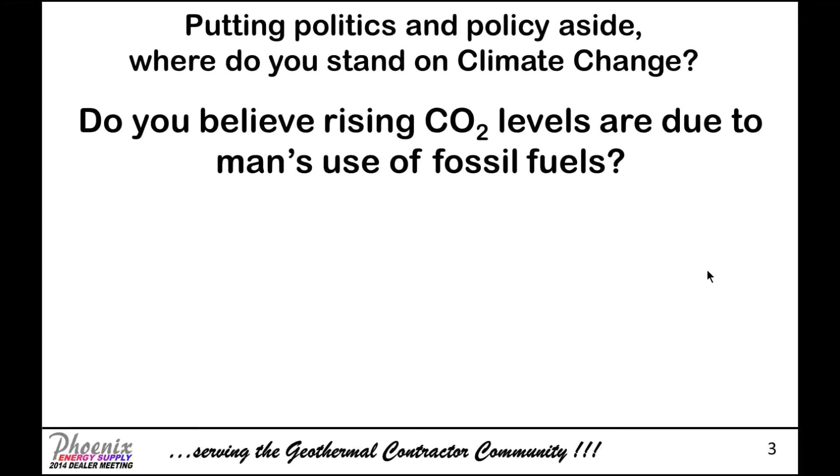The point of my presentation is simply your opinion doesn't matter if your true goal is to sell geothermal. You have to know your customer, and at the end of the day, you want to reinforce that your customer is making the buying decision for reasons that are important to them. My goal today is to arm you with some facts, some perspective that you might be able to reinforce in their perspective. And as Kermit said, it's not easy being green.

One very important aspect of the environmental benefits of geothermal is the so-called carbon footprint. To give you a benchmark, I'm looking at coal, which has a CO2 output per pound of coal of 2.48 pounds. The energy content is 12,250 BTUs. Efficiency could be anywhere, but using a number like 65%, I get a net CO2 output of 311 pounds per million BTUs.

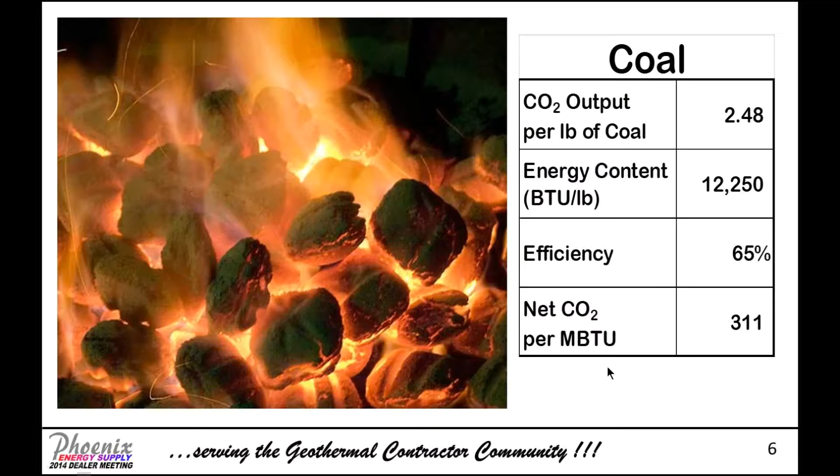Moving on to fuel oil, and of course everybody likes to see one of these in your basement, very sightly. But looking at fuel oil, the CO2 output is 26.4 pounds per gallon of oil. The energy content of oil is 140,000 BTUs per gallon. Efficiency, we'll use 82%. So the net CO2 output is 230 pounds per million BTUs.

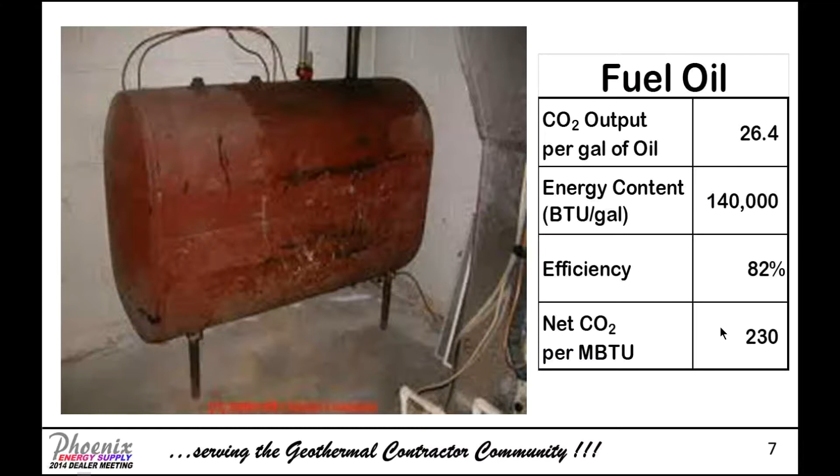And then, of course, you could choose to have one of these lawn ornaments near your house, and of course it's propane, and we all got put into sticker shock this year, or perhaps we're applauding the spike in propane prices. But the CO2 output for LP is 12.1 pounds per gallon. The energy content is 95,500 BTUs per gallon. Efficiencies could be much higher. It's fundamentally a cleaner fuel, so burning it in a condensing combustion is a good way to stretch efficiency with propane. But the net CO2 output is 135 pounds per million BTUs.

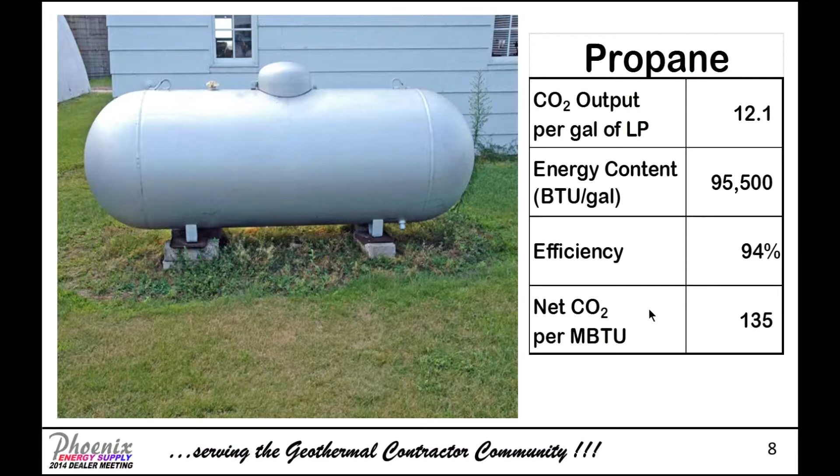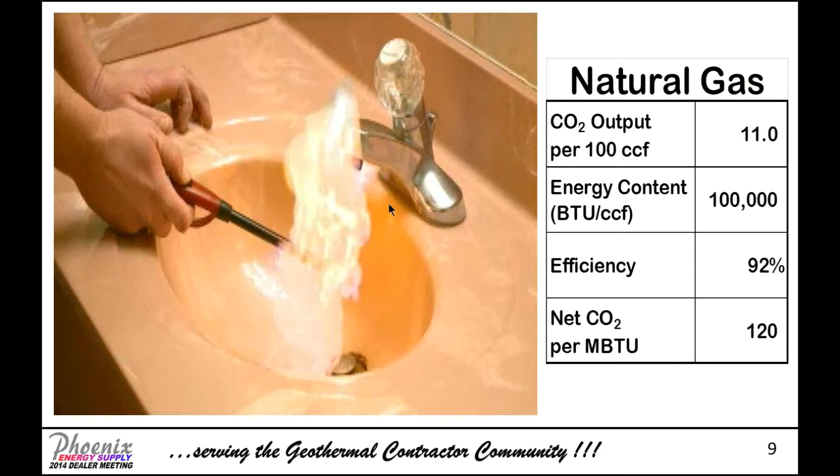And then our most favorite fuel, which is often touted as being environmentally clean, is, of course, natural gas. Now, you all in the East may not be as sensitive to fracking as New York State and other states have become. Perhaps this is a little unfair to illustrate natural gas coming out of your faucet, so we'll go ahead and use a more conventional furnace. The CO2 output per 100 CCF is 11 pounds. The energy content is 100,000 BTUs. Efficiency could be 92%. So basically, natural gas will emit 120 pounds of CO2 per million BTUs.

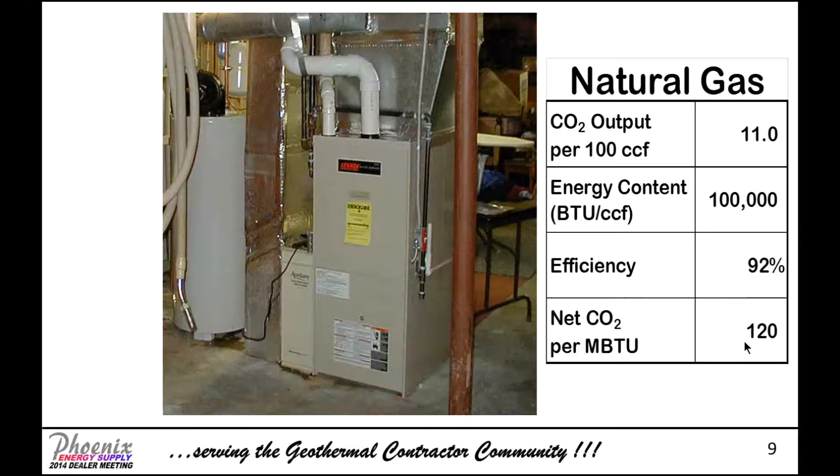Now let's look at electric resistance heat. The key parameter here is how many pounds of CO2 per kilowatt hour. It varies all over the place. If you were to live in Chicago, you're probably close to 2 pounds per kilowatt hour due to the fact that 95% of the electricity is generated with coal. The 0.49 pounds is indeed central New York, which is a fairly clean area of New York. New York State average is 0.76 pounds per kilowatt hour. I would encourage you to explore your own local generating utility companies to see what their carbon footprint is. The energy content, 3,400 BTUs per kilowatt hour, is essentially 100%. Every kilowatt hour does indeed turn into 3,412 BTUs. So the net output of an electric resistance heater in central New York is 144 pounds of CO2 per million BTUs.

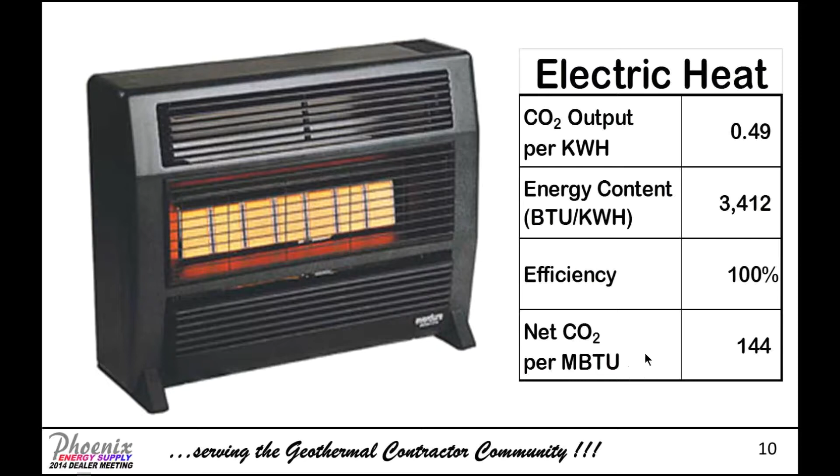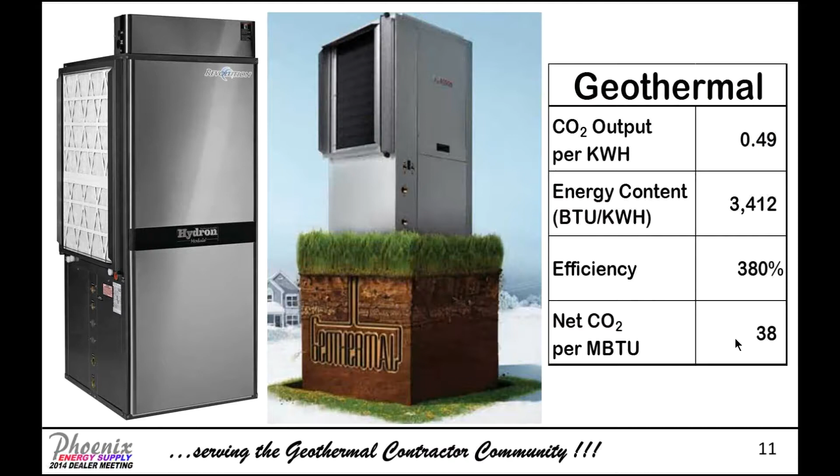Moving on to geothermal, again you've got to calibrate it based on your local electricity generation mix, and certainly in the long term, the grid will get greener, so it will improve over time. Energy content, again, is 3,412 BTUs per kilowatt hour. However, we have an efficiency, a COP of 3.8, we could essentially say it's 380% efficient, and therefore we're going to emit 38 pounds of CO2 per million BTUs.

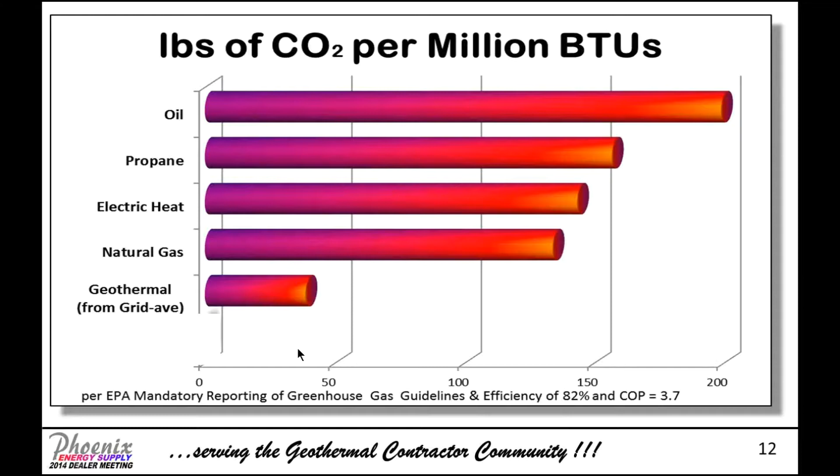To illustrate this graphically, we can show the oil, propane, electric resistance heat, natural gas, and geothermal in terms of pounds per million BTUs. However, geothermal, when combined with renewably generated electricity, truly makes a zero carbon situation within reach. Whether you generate electricity on site or you buy from the green portfolio off the grid, you can truly achieve a net zero, not only in energy, but in carbon.

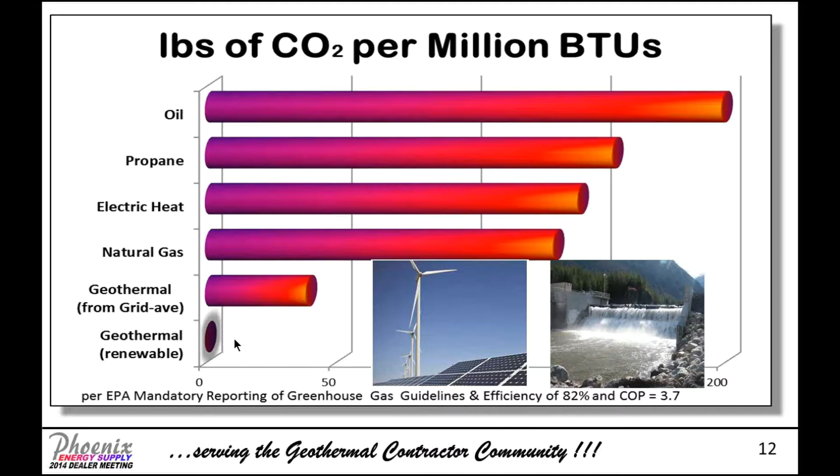We've developed these posters. I know you probably can't read any of the data on here. We've used these effectively to compare geothermal to other renewable technologies. And there's certainly been a debate as to whether or not geothermal is renewable, but considering three-quarters of the energy is essentially harvested solar energy from the ground.

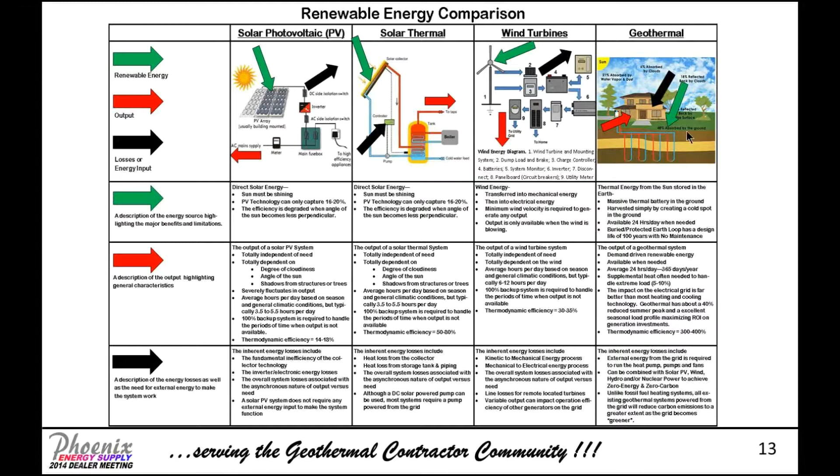This is the first page. The second page, there's a couple lines I do want to point out in making this comparison. One is, what is the average hours per day that the various renewable technologies are available? Geothermal is around the clock, 24 hours a day. The installed cost, generally solar PV is going in for anywhere from $4 to $6 a watt right now, compared to geothermal, which is going in at about $1.50 to $3 a watt.

Market penetration potential. Not every house is going to be suitable with the appropriate orientations and solar exposure to have significant market penetration.

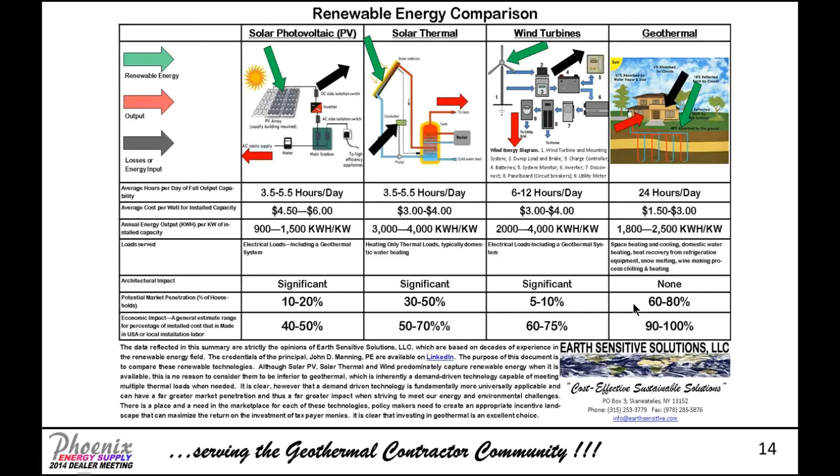Whereas I believe geothermal, most of the buildings out there could be dealt with on a geothermal technology of one kind or another.

So what do you say when your customer asks you about the environmental benefits? Keeping in mind the focus is to close the sale and sell them a geothermal system that meets their needs. Basically, I would suggest you mirror and reinforce their reasons to spend money with you. Stay in your comfort zone, but expand your comfort zone. Understand some facts that can help sway them to writing the check.

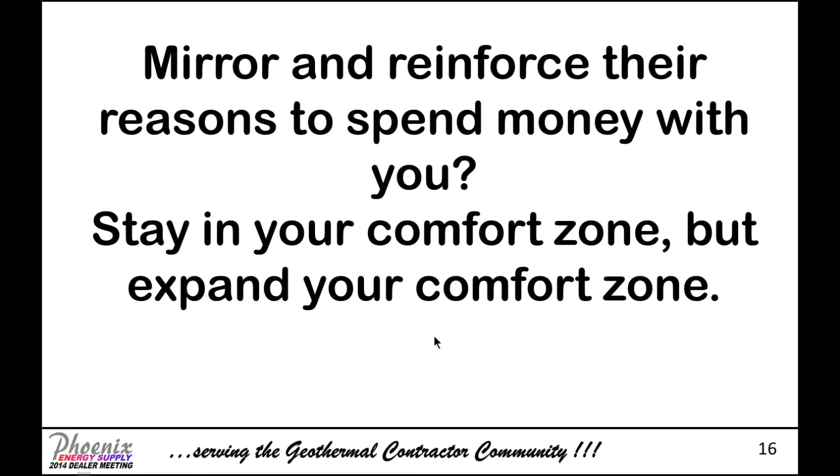So the question: do you design or install hydronic systems using water-to-water heat pumps or geothermal heat pumps? I know it's a growing area. A good percentage of our business is in water-to-water heat pumps, and I think there's a lot of good reasons for that.

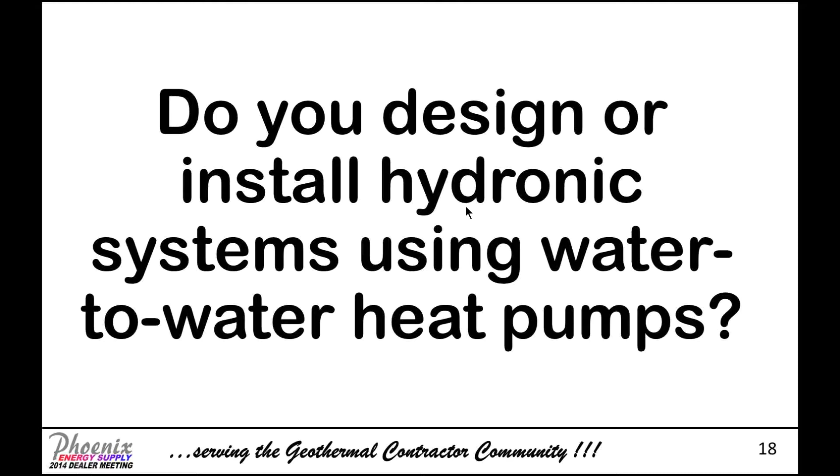So the first step is understanding that the load distribution system will determine the temperature that you will need to satisfy the BTUs in the various zones of this application. And the use of outdoor reset or other demand-driven control strategies will allow this temperature to be optimized.

To improve overall seasonal performance. But using the single design day requirements will allow us to analyze the system performance.

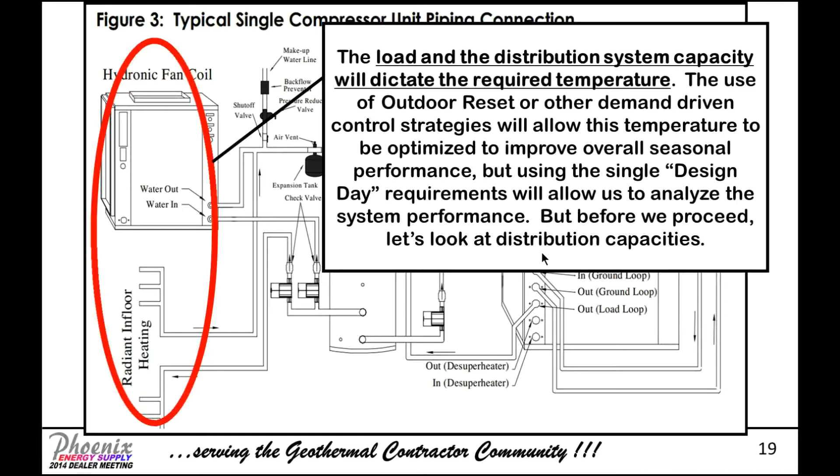So I'm going to walk through some calculations, some examples that illustrate this point. We're going to use design day requirements. But before we proceed, let's look at distribution systems and capacities.

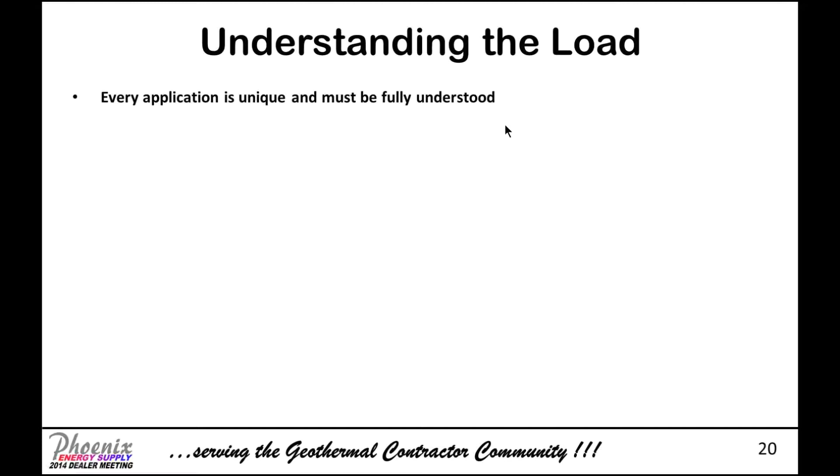Understanding the load: every application from a hydronic perspective is unique, and it must be fully understood. Experience in a specific type of application may allow some seat-of-the-pants estimating, but should never replace the appropriate calculations when designing a system.

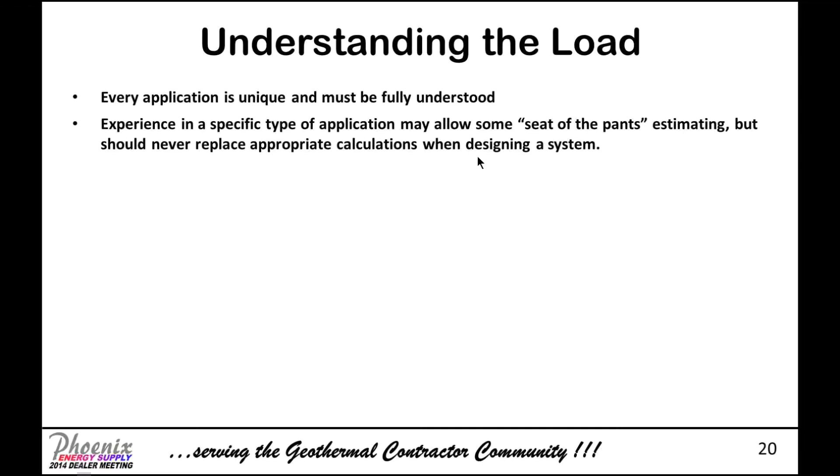I've seen way too many hydronic jobs get in trouble just because too many assumptions were made up front, and it's very hard to go back and retrofit and make significant changes to the distribution system.

Generally, in upstate New York, and I'm sure Connecticut as well, residential heating loads will fall between 11 and 23 BTUs a square foot, with 11 being an extremely well-built, tightly constructed house, and frankly it's very unusual to find builders that build that good.

And the 23 being older, single-story homes.

I've seen some farmhouses that might be upwards to 30 to 35 BTUs a square foot. But for the sake of our analysis, we're going to look at 18 BTUs a square foot as an overall average for a house.

That's the average for a typical house, while the room-by-room calculations can also offer up a wide range. You may have a corner room with multiple windows that needs more energy than a central or isolated room in the house.

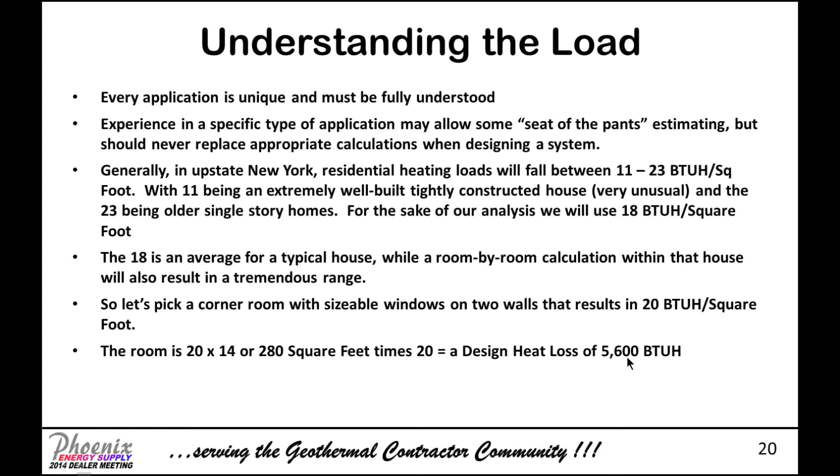So let's pick that corner room, and we're going to raise it up to 20 BTUs a square foot. And we're going to say it's 280 square feet, just to give us a number to work with. So the heat loss on a design day is 5,600 BTUs an hour.

To cover those really nasty days, and we've all had a bunch of them this year, I would use a safety factor for that particular zone, or every zone in the house, to put out more heat than the design day. Because typically with a boiler, we have a safety factor built in.

We can turn up the temperature, but with geothermal, we can't. So we've got to make sure we've got enough distribution capacity to meet that load, even on the worst day you could imagine.

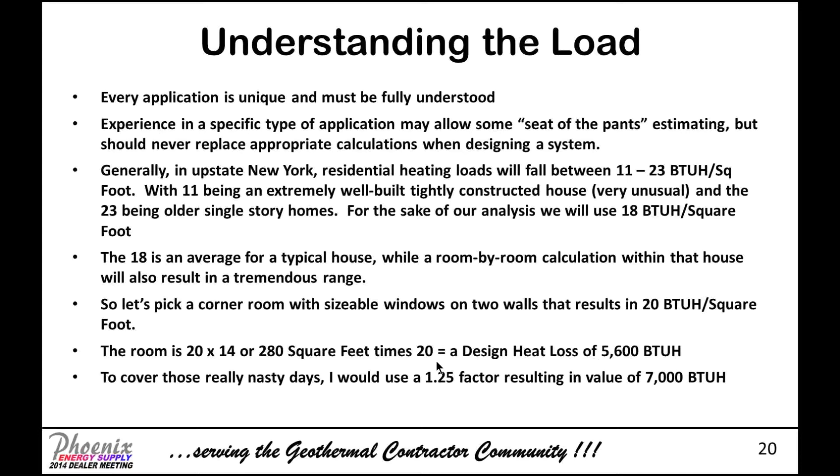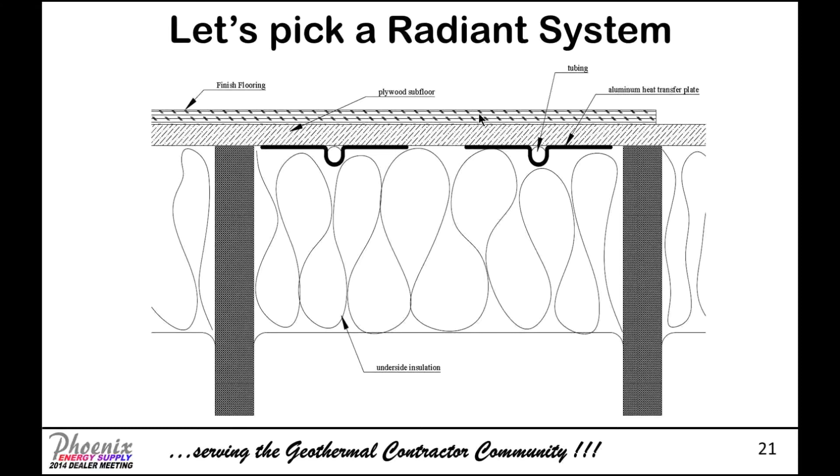A typical layout looking up from the underside of the floor, you've got your floor joist. You've typically got two runs per floor joist cavity, which works out to be 8 inches on center. And there's a certain performance that we can calculate with this type of setup.

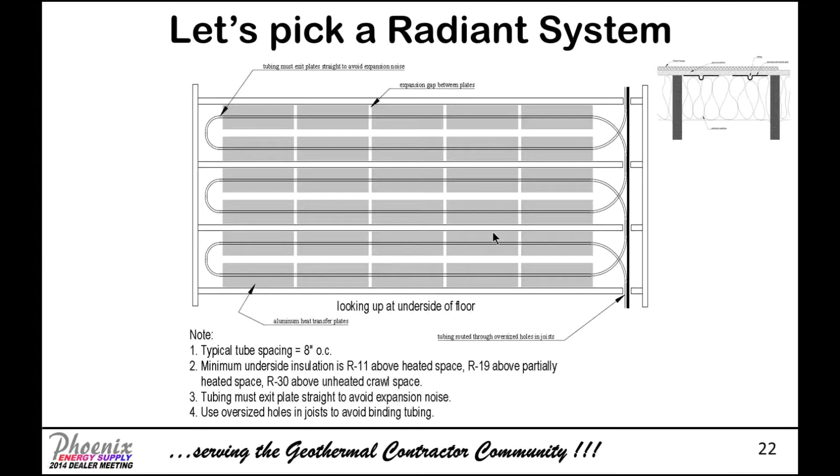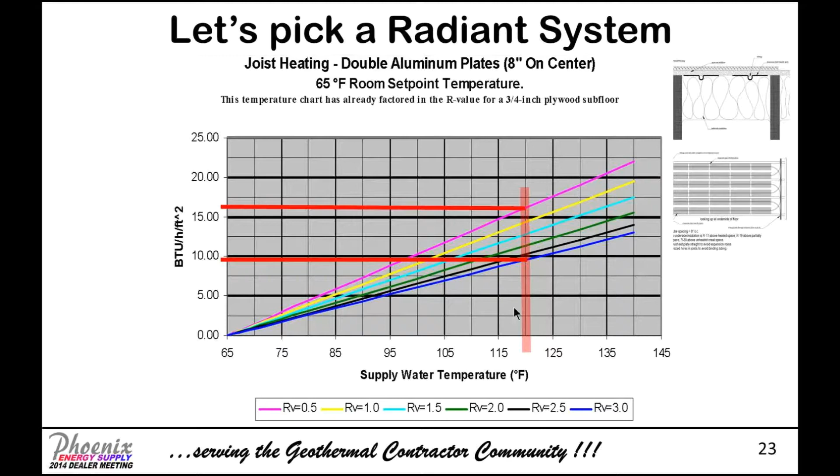That's illustrated here in this chart, where at various entering water temperatures and various resistance values reflecting what might be on top of the floor—whether it's carpeting, hardwood, ceramic, or throw rugs—you'll end up somewhere in this spectrum, with the highest output being totally unencumbered hardwood or ceramic floors. If we put a maximum water temperature of our geothermal system at 120 degrees, that highlights the range of output we can expect on a staple-up system: anywhere from around 9.5 to 10 BTUs a square foot, upwards to maybe 16.5 at 120 degrees with the best floor conditions.

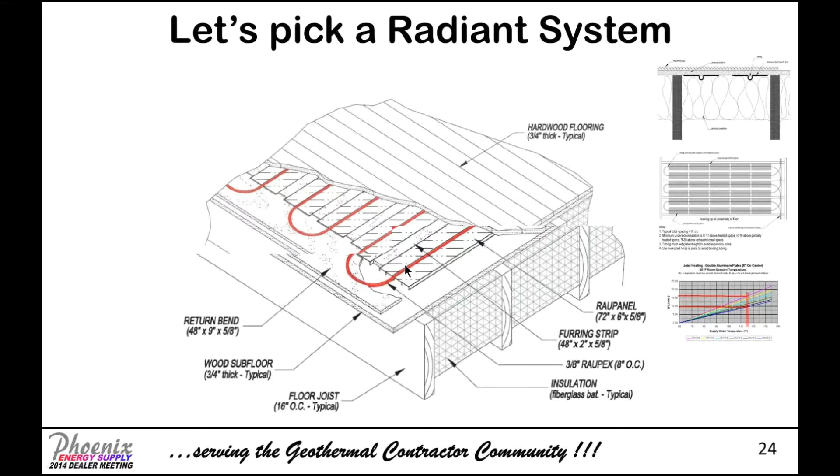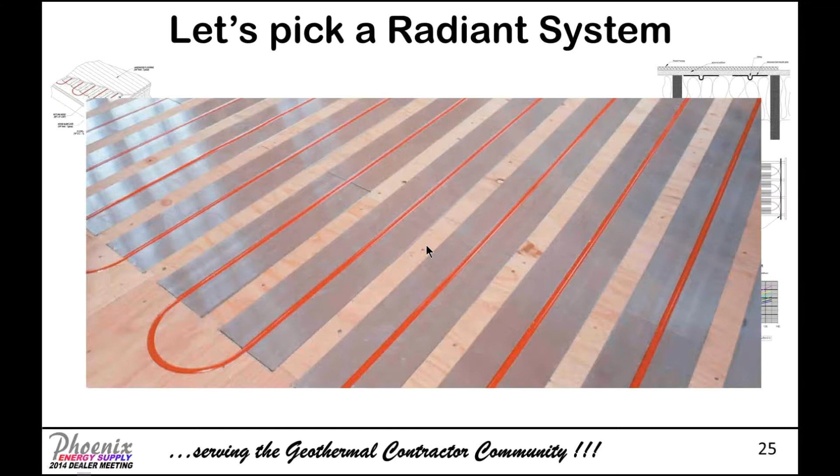This is what the RAUPANEL system looks like, with the aluminum extruded plates, the PEX tubing, and typically nailer strips to give you 8 inches on center. If you remove the nailer strips, you could tighten it up to 6 inches on center.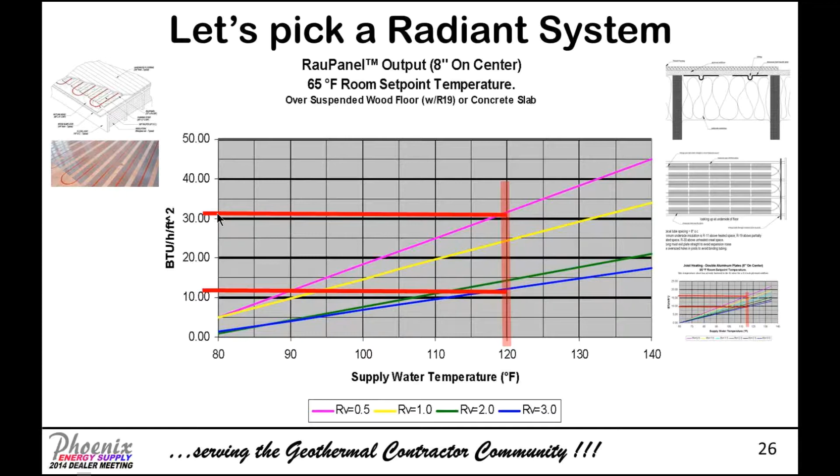And with a similar performance curve, we can now look at that 120 degree water and realize this system can go from maybe 11 to 12 BTUs a square foot to over 30 BTUs a square foot with the same water temperature.

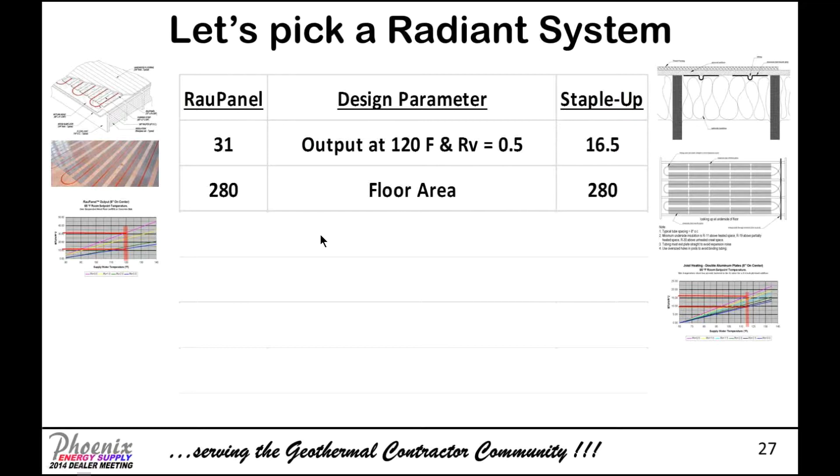Going down and comparing RauPanel to staple-up, essentially here's the output at 120 degree water with an Rv of 0.5. The floor area in our room is 280 square feet, so the capacity of that floor for RauPanel is 8,680 BTUs, while the staple-up will only deliver 4,620. So what do we do with that when we have a desired output of 7,000?

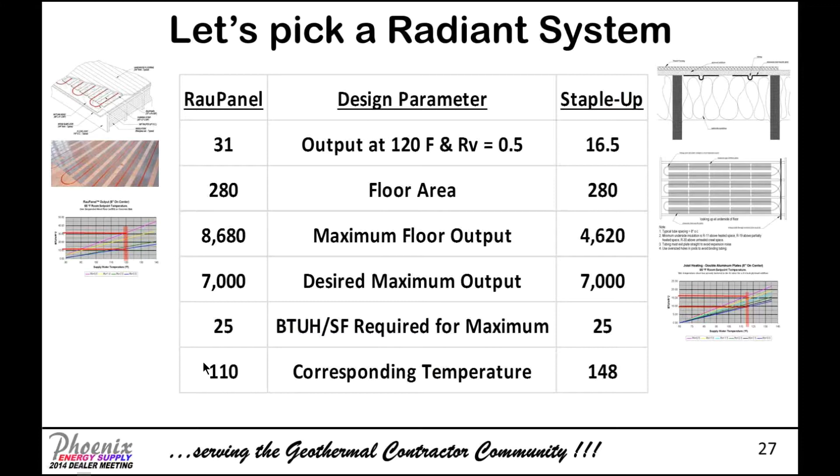Well, we can change the water temperature. We'd like to get that 25 BTUs a square foot. For staple-up, we'd have to raise that temperature up to 148. For RauPanel, we could actually turn it down to 110.

Other ways to distribute heat in a hydronic system are fan coils. Typical multi-position fan coil, nominal tonnages 2 through 5 ton, give out pretty good heat at 120 degree water. There's also a line of fan coils with much smaller capacities, made by Aermec, an Italian company, that have worked out extremely well with variable speed drive fans that do an excellent job keeping noise levels extremely low and improving latent capacity and cooling.

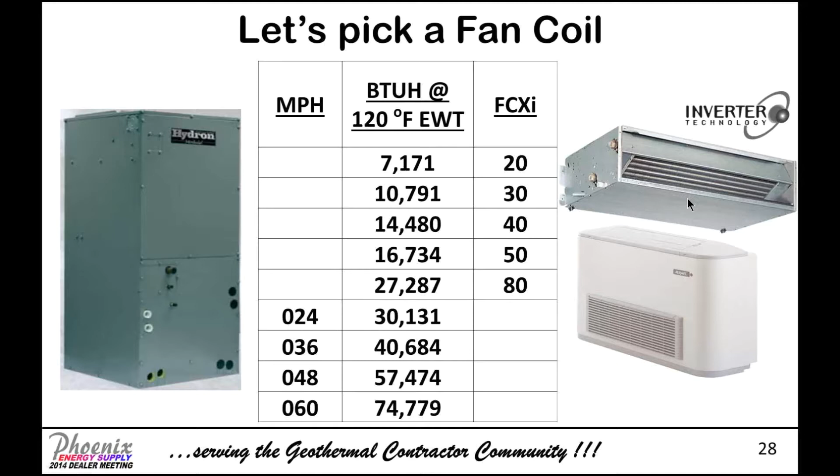So let's take a look at a typical system. We're going to control the buffer tank temperature, and that's what cycles the heat pump on and off to maintain that tank at our desired temperature. We've got a 120 degree requirement—we figured out that might be what's needed for this particular job. So we're pulling off near the bottom of the tank.

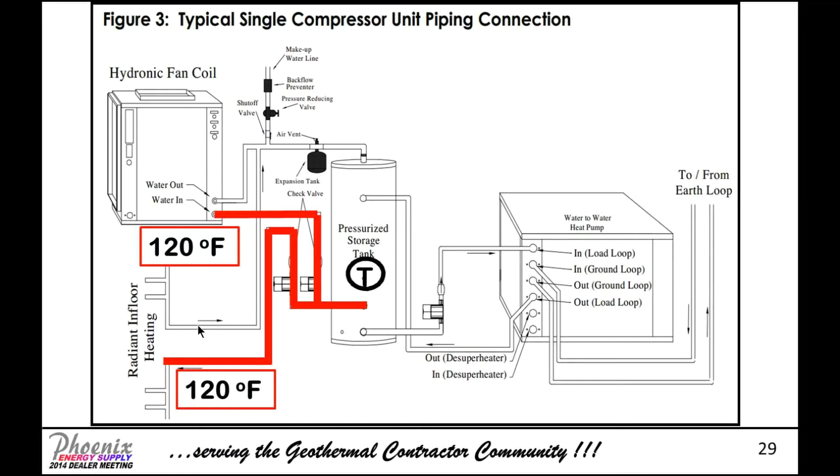This happens to be a diagram from the Enertech manuals. We're pulling off near the bottom of the tank, feeding 120 degree water to the load. That also means we're probably coming back to the buffer tank, if the flow rates are up where they should be, with about a 10 degree drop—so we're coming back into the buffer tank at 110. We're also sending 120 degree water to the heat pump, forcing it to have a leaving load temperature of 130, which penalizes the heat pump because it has to work harder to keep this tank at 120 degrees.

The flow rates we operate at are so large compared to the volume of the tank that you can virtually forget about any stratification in the tank.

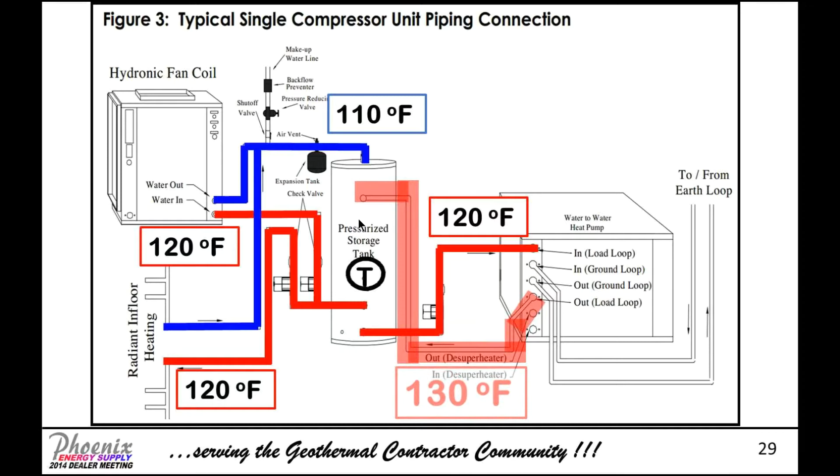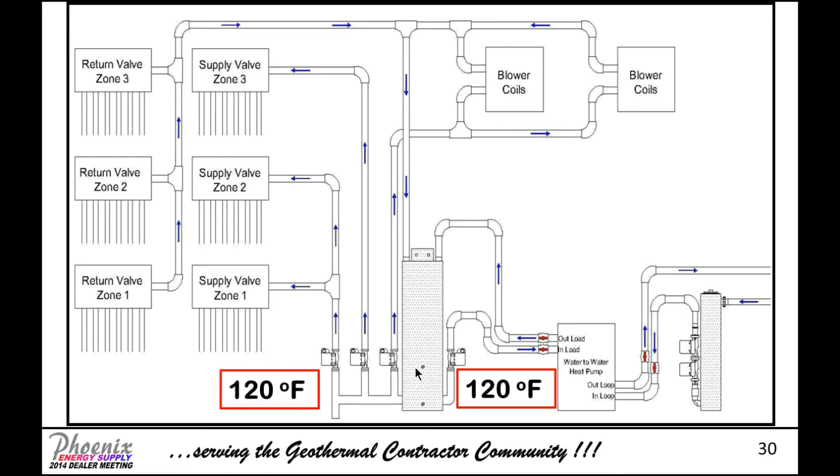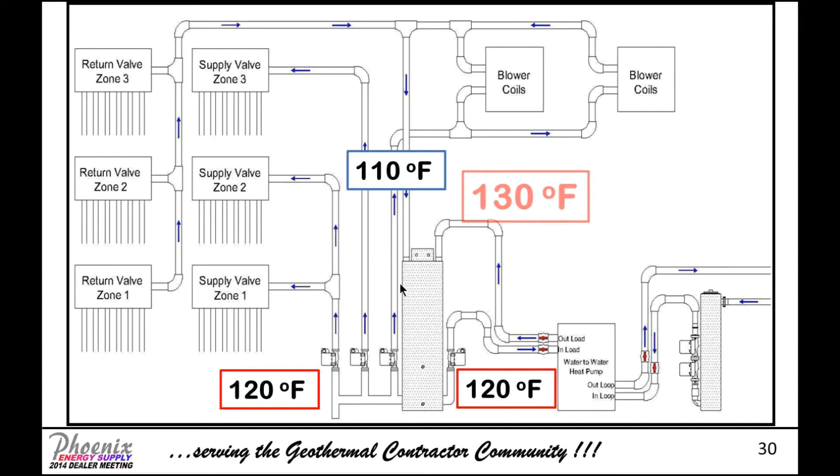Another illustration, this one put out by B&D Manufacturing with their HSS buffer tank. In this case, we've got 120 degree water going to the load, and again we're going to have 120 degree water go to the heat pump, with 110 coming back from the load, which means our heat pump again is working to deliver 130 degrees so that we can deliver 120 to our load.

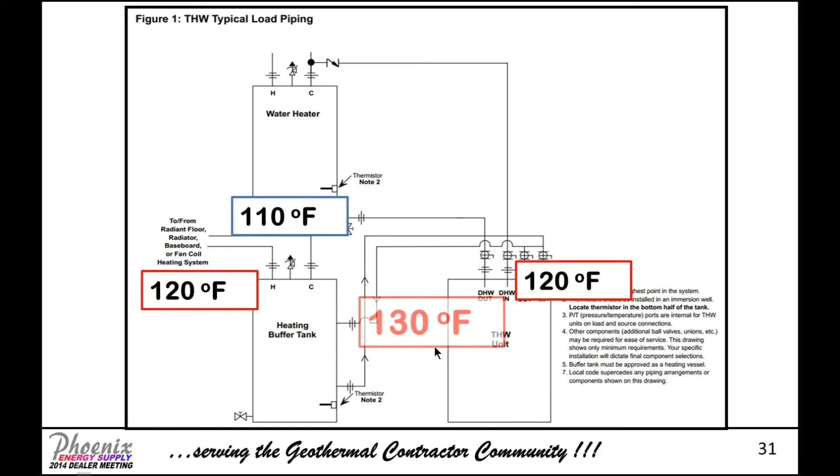A Climate Master illustration. Again, 120 degrees going to the load, 120 degrees going to the heat pump, and roughly 110 coming back to the buffer tank, and the heat pump again has to raise the temperature to 130.

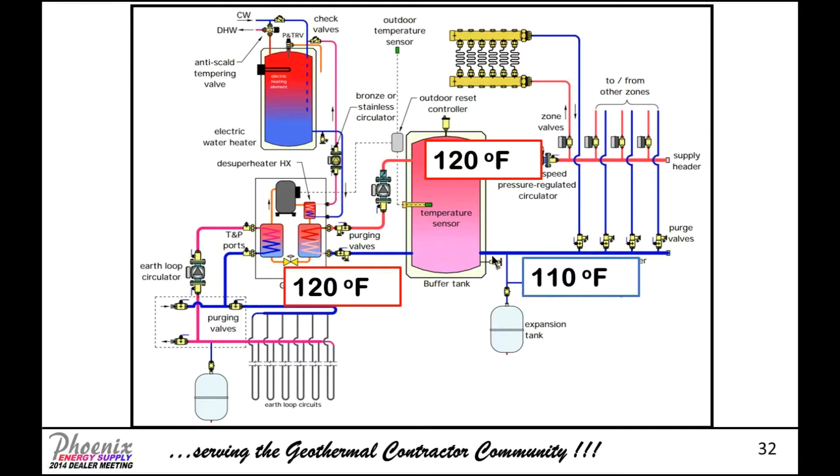Again, if we need 120, we've got to send 120 to the load. We're going to end up sending 120 to the heat pumps, 110 returning from the load, and again 130 leaving the heat pump.

So in spite of the fact that the industry has all embraced these concepts, the question is, why are we sending the hottest, or coldest in the summertime, water in the system back to the buffer tank where it is mixed and diluted to a lower temperature before we send it to the load?

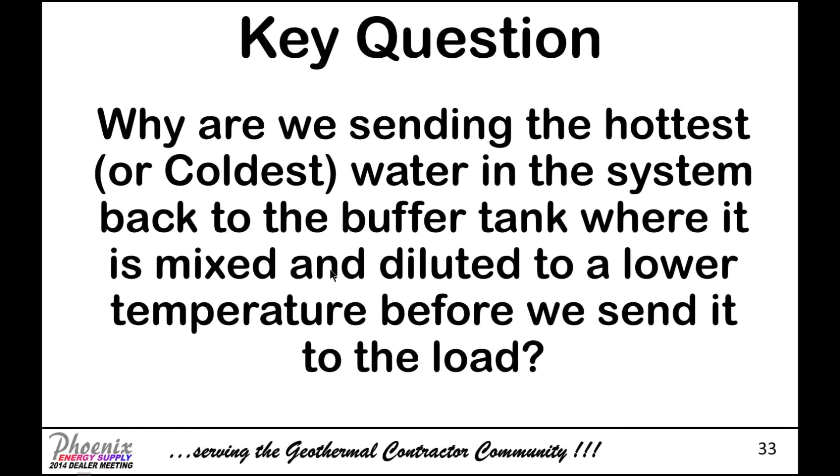And what I'm going to suggest is a simple, different way of piping a hydronic geothermal system. In this case, we still need 120 degree to go to the load, but let's take the output of the heat pump and allow it to go straight to the zone with a branch circuit that will allow some of it to come back to the buffer tank.

So if we need 120, we make 120. And again, our load will return at 110, and that will turn right around and go to the heat pump at 110. So we've managed to relax the stress on the compressor by 10 degrees.

Now there may be times when the tank becomes satisfied, and in those situations, essentially the load distribution pump will draw directly from the top of the tank and go to the load. So we can maintain a fairly uniform delivery temperature, and then with the dead band associated with this control, the heat pump will cycle as needed.

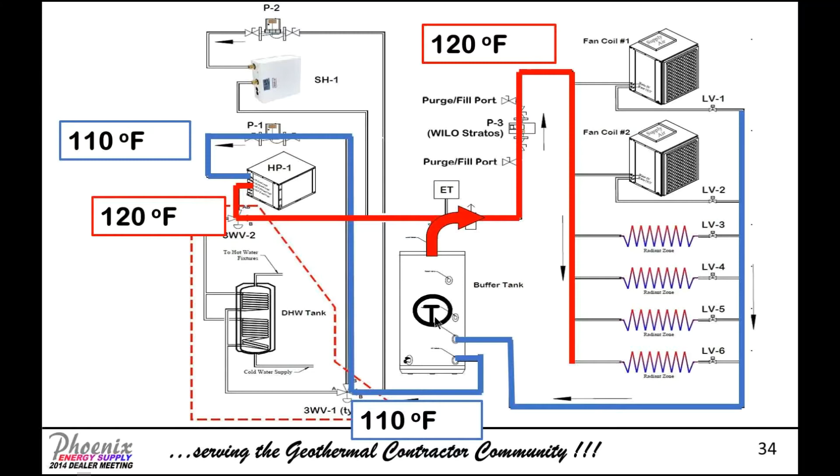Now, why is this important? Here's a performance table of an Enertech heat pump, and all water source heat pumps pretty much have similar data. They illustrate at a 30-degree entering water on the source side, even 40 degrees, we can look at leaving or entering load temperatures, 110, 95, and we can see the corresponding COPs.

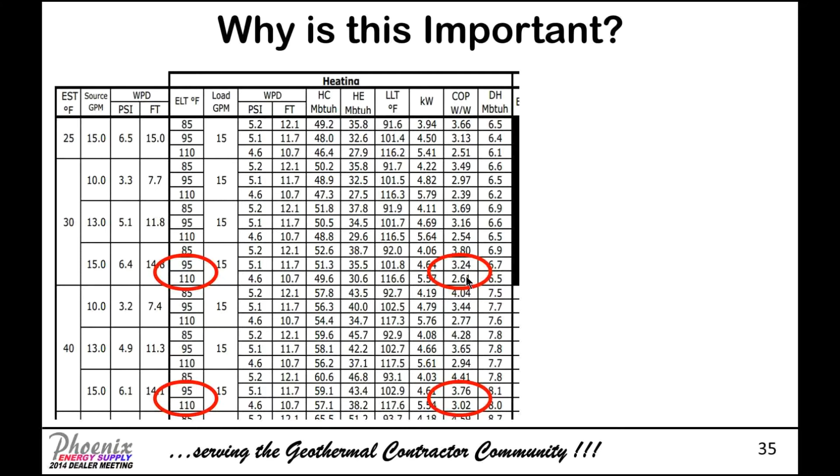And you can tell right away that it's dramatic. We're going to do a little interpolation to pick the difference for 10 degrees, which is roughly the benefit of piping it differently. And essentially that 10-degree change will result in a 16% improvement in COP.

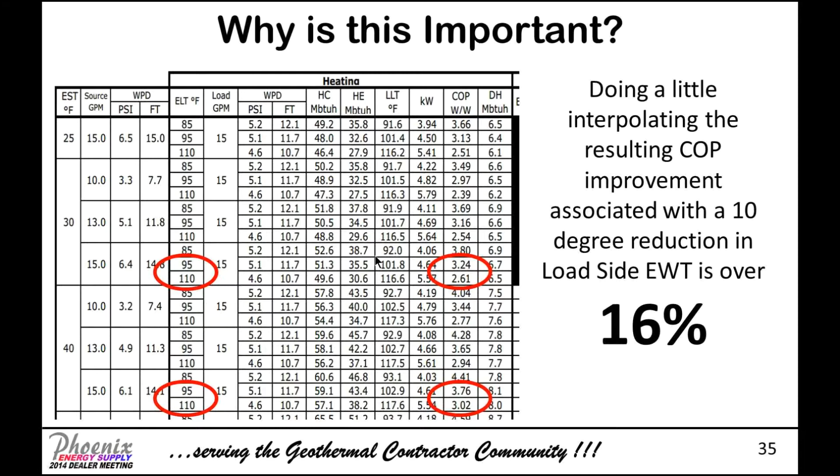And when we're out there competing with natural gas before the recent price hikes, the geothermal may have only been 10%, 20% better. So if we were losing 16%, that is significant.

I do want to recognize the real brains behind this concept. Jens Ponikau, I would encourage you all to get to know Jens. He's one of the most interesting people that I've ever met. He's decided to pick up and start Buffalo Geothermal, and in the last 5 years, they've become the dominant geothermal player in Western New York. But what I really want to recognize Jens for is not his insight, but his generosity. He freely shared this idea with me and encouraged me to go out and share it with everybody so that we can all benefit.

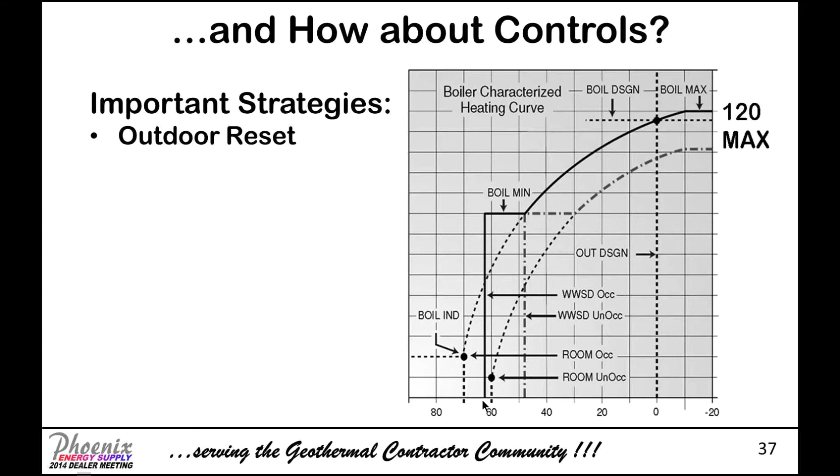And how about controls? How do you control these systems? Well, some important strategies: outdoor reset. This is taken right out of a tekmar manual. The type of outdoor reset which further reduces the load temperature as the outdoor temperature gets warmer. Very important in a geothermal system.

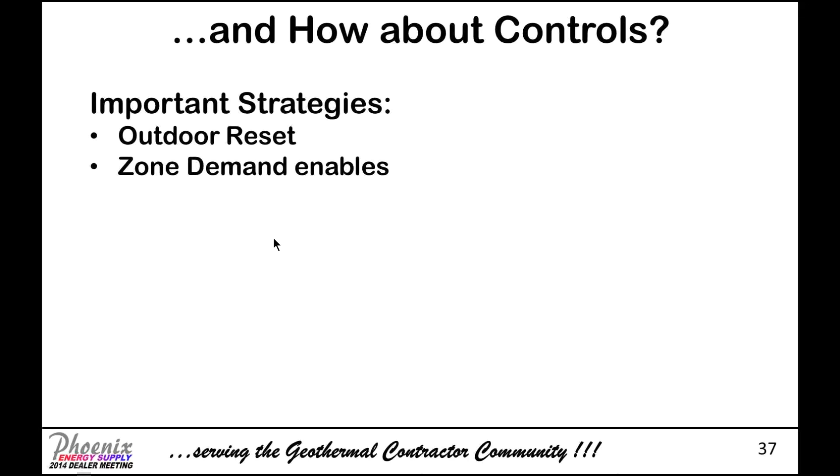Zone demand enabled. What I mean by that, if you don't have a call for heat from any of the zones or a call for cooling in the summertime, let the buffer tank float. Don't allow the heat pump to even run. What that does for you, it allows you to even push buffer tank sizing to be a little bit smaller, because if you do have a load that is sucking heat out of the buffer tank, it will make the heat pump think it's a bigger tank. So, zone demand enabled.

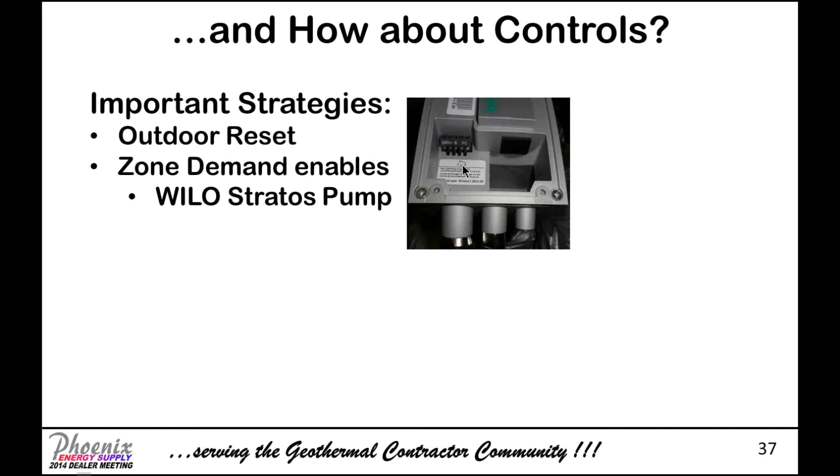WILO Stratos pumps. If you're not familiar with these, I would encourage you to look at them. Certainly Grundfos has come out with a wonderful line, and they will continue to, I think, make great strides in bringing ECM technology to the market. But we've been using the WILO Stratos for at least 5 years now and have tremendous luck with it.

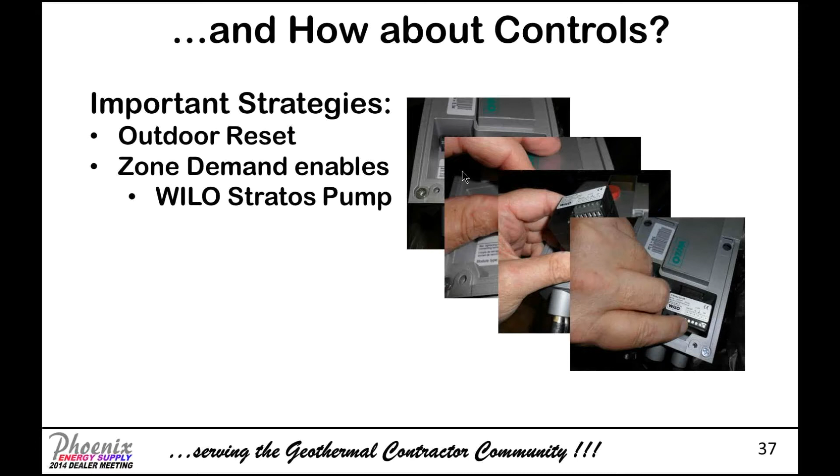This little device called an external off, you simply put it inside the control box of the pump, and these two terminals called external off have a jumper there. Well, you remove the jumper, put a set of dry contacts, could be on a relay, could be a bunch of zone valve end switches wired in parallel, so that if and when you get a call, you turn on the pump.

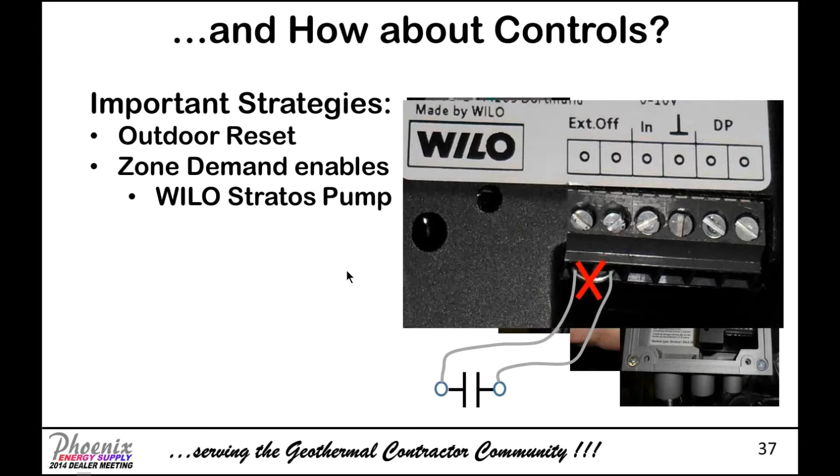Heat pumps. We typically use a boiler control, and this is how you could also disable the heat pump. If you remove this boiler demand signal, then you will not get any outputs and the heat pumps are not allowed to run.

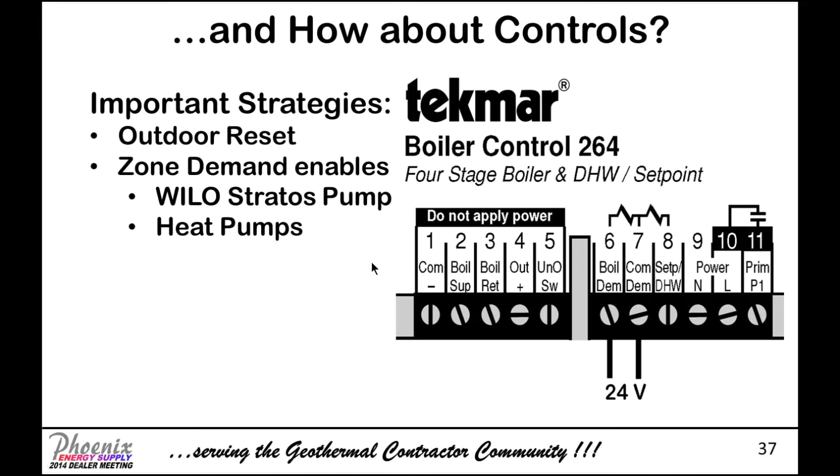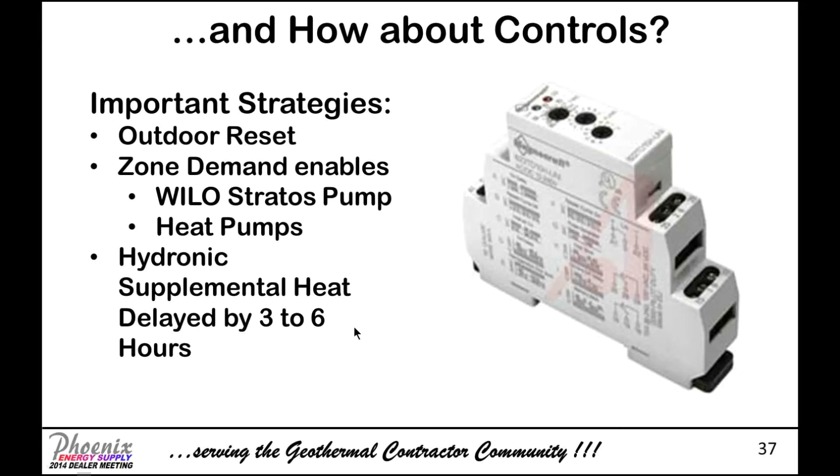Hydronic supplemental heat. Now we incorporate 11 kW supplemental electric resistance heat, so we don't have to oversize our geothermal heat pump, but we also put it on a 3 to 6 hour delay so that we do not prematurely turn it on.

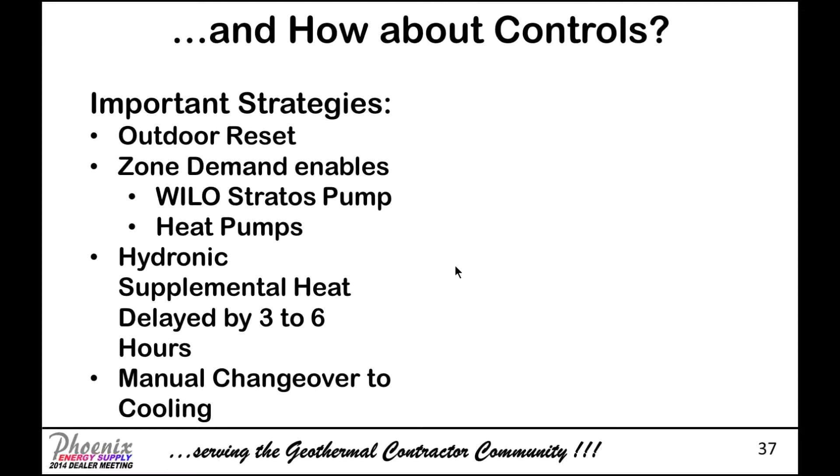Manual changeover to cooling. We strongly encourage that because you could get into days where you may need a little heat in the morning and a little cooling in the afternoon, but we allow and almost force the homeowner to make that choice instead of automating it and simply going back and forth if nobody really needs that level of comfort control.

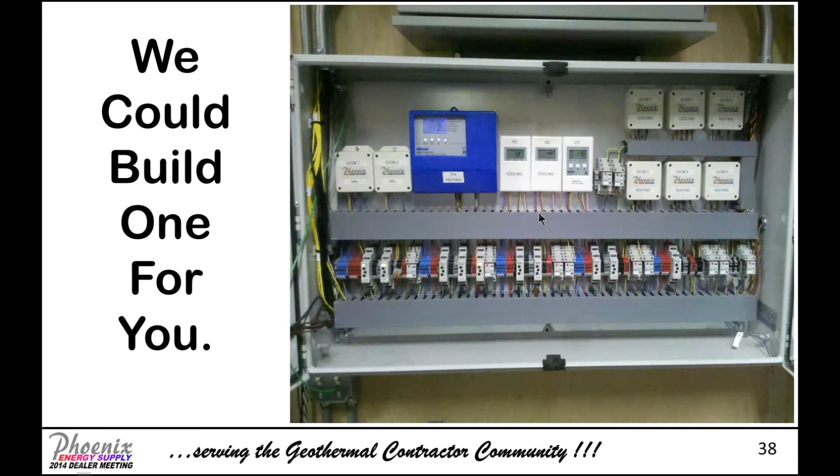Now, every hydronic job we've been involved with has presented unique wiring requirements. We have gotten into the business of providing wired control boxes. This one certainly looks rather intimidating with the number of controls incorporated in this box. But here's the system it's controlling.

25-ton, five 5-ton water-to-waters, doing 100% of the heating, cooling, domestic hot water, and a bit of snow melting. And that control box controls it all.

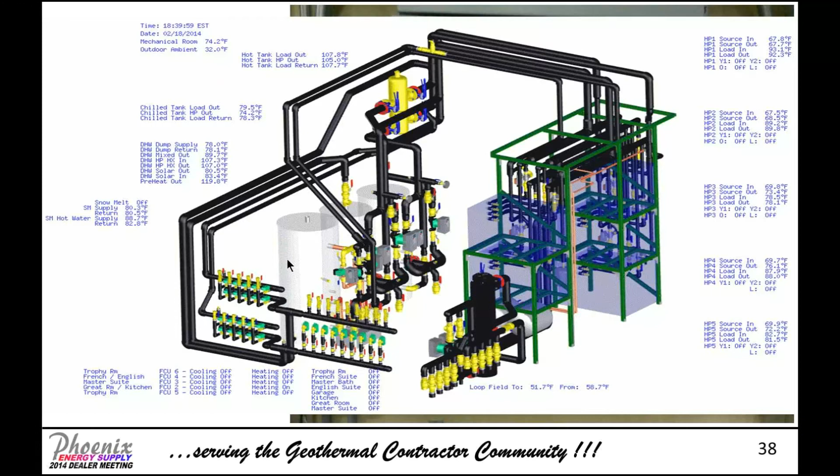This particular client wanted the ability to provide cooling in the middle of winter if he were entertaining in his banquet room. So we provided home run circuits to each fan coil that can come off of either the hot manifold or the chilled water manifold, with just a small difference in temperature.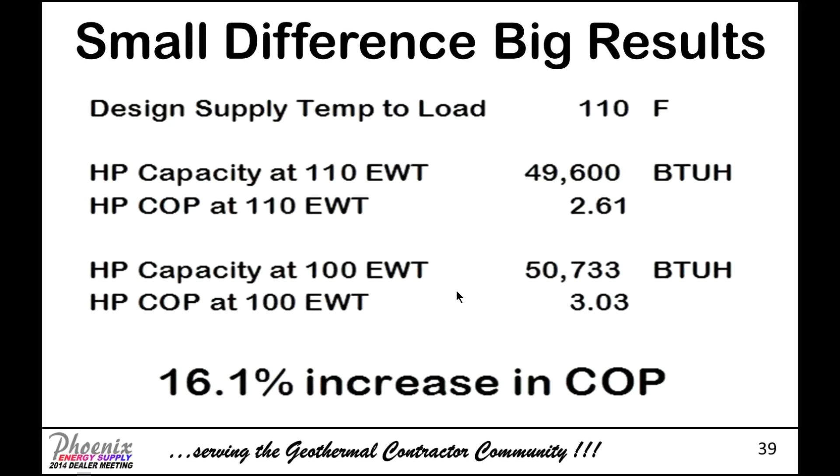Take another look at the details. A heat pump capacity at 110 degree entering. This is a real life example: 49,600 with a COP of 2.61. Just by lowering that entering water by 10 degrees, we've gained some capacity, but the COP has gone up dramatically, a 16.1% increase in COP.

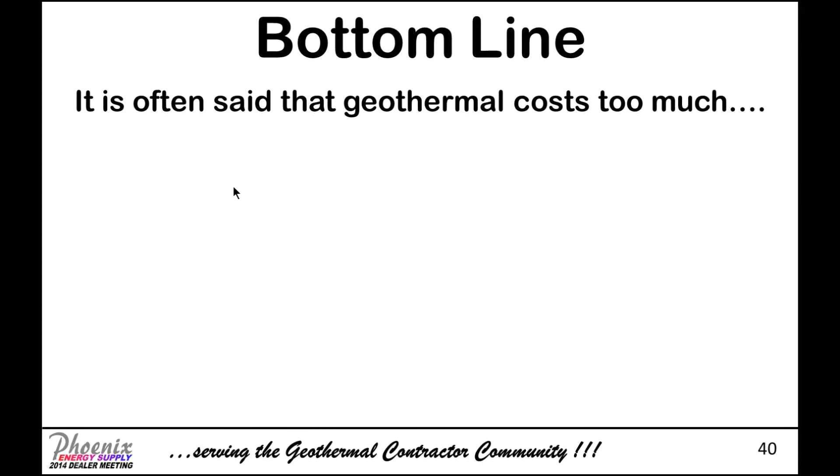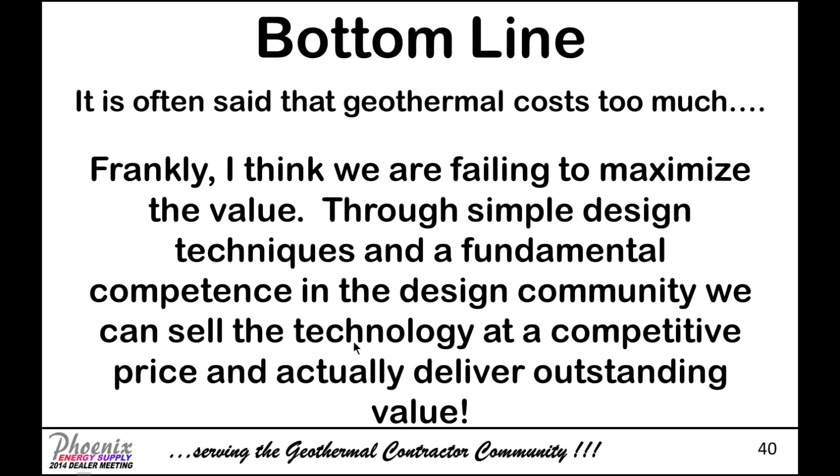The bottom line is it's often said that geothermal costs too much. I'm sort of the opinion that it doesn't cost enough, because if we truly do a good job, we can sell it at a higher price. I think we are failing to maximize the value. Through simple design techniques and a fundamental competence in the design community, we can sell the technology at a competitive price and actually deliver outstanding value.